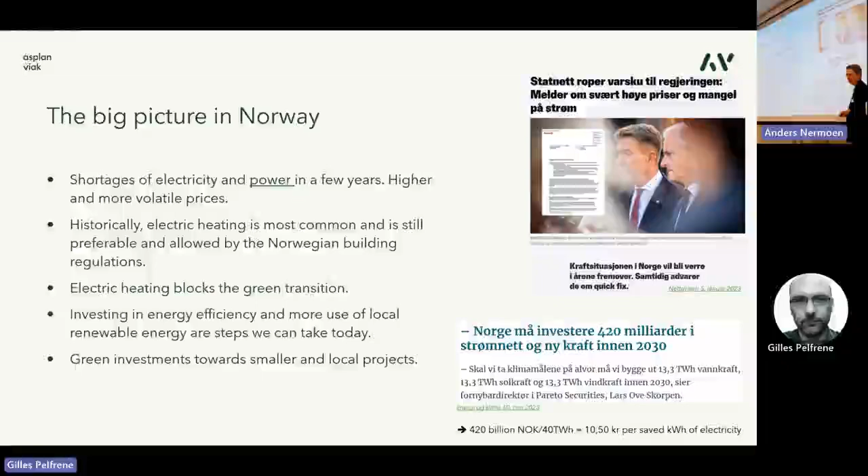And all these things we can do right now. There are also green investments towards smaller and local projects, which I'll come back to. If we use local energy and energy efficiency measures in our buildings, we can reduce the need to invest in new power generation, nets and infrastructure. And this is worth 10.5 Norwegian crowns per kilowatt hour in production capacity. So for every kilowatt hour we produce locally or save in other measures, it's worth more than 10 kroner for society.

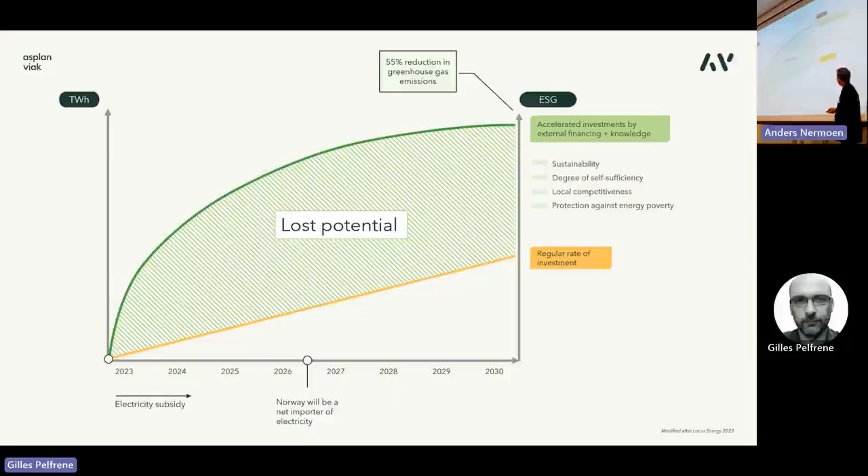So we have some goals in 2030, a 55% reduction in emissions. We have an electricity subsidy this year and next year. We will be a net importer of electricity between 26 and 27. The rate of investments is not high enough to reach those goals, but we can accelerate this with external finance and competence. And everything in between is lost potential. If we manage to realize that potential, we gain sustainability, a degree of self-sufficiency, local competitiveness and protection against energy poverty.

But it does not stop. In 2030, we have the Energy Performance of Buildings Directive, which is very relevant here, and everything has to be net zero in 2050.

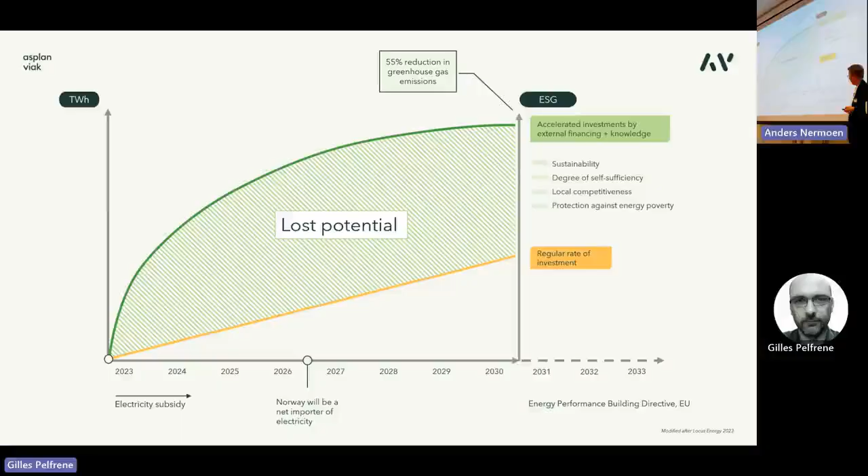So the potential for ground source heat: we can heat and cool our buildings with this technology in Norway, and that will produce 33 terawatt hours from the ground every year, equivalent to a fifth of today's electricity production. So it reduces the strain on the grid, and electricity can be used for higher purposes, industry and electrification of the transportation sector. And it's, of course, great jobs. This was a study from 2011 for the Norwegian energy authorities.

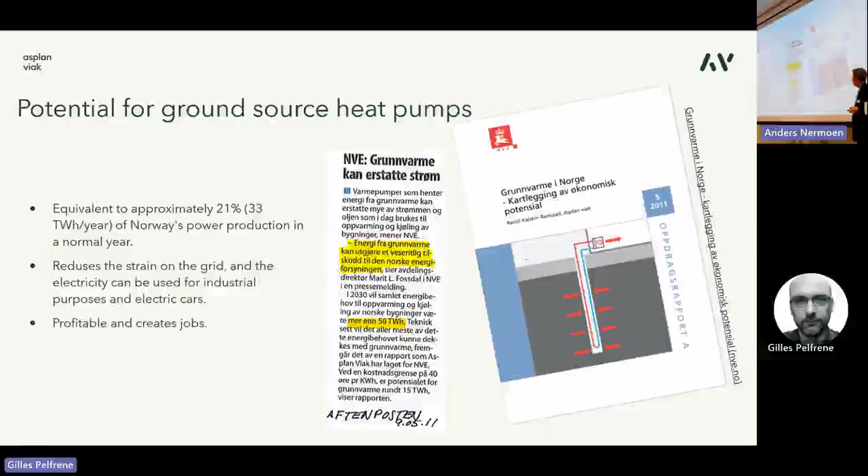So Asplan is involved in projects all around the country and also a few projects abroad, about 100 a year. And we serve several of the drillers in Norway and have developed services within the technology since we started at Asplan in 2008.

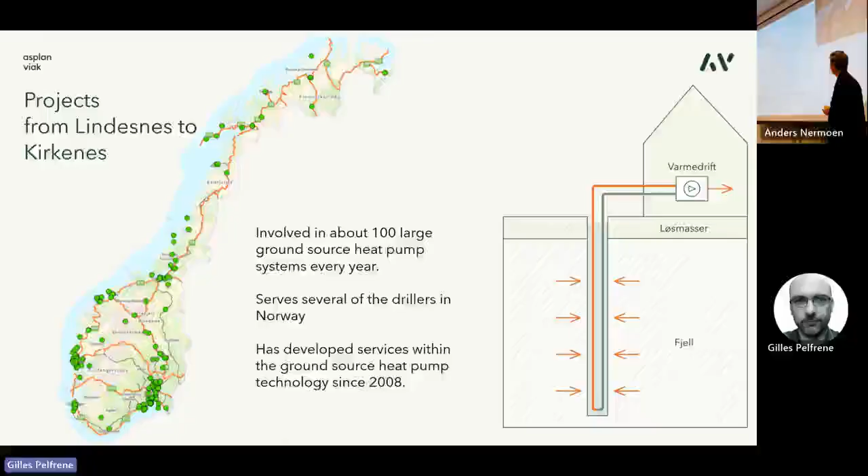So to the technology: we have a borehole with a plastic collector, and we have a heat pump. The normal temperature in the Norwegian bedrock is around 6, 7, 8 degrees. So we need a heat pump to raise this temperature to a decent level for heating the buildings, floor heating or radiators.

So the energy well looks like this. These are off-the-shelf products. We drill a lot of wells every day. Closed loop is most common and can be installed almost everywhere. Typical depth is from 150 to 300 meters, or sometimes deeper. Large and small, for a single cabin or for a large hospital or district heating system.

We collect stored heat in the ground, and this is not heat from groundwater movement. We have several measurements on that, so it's really stored solar energy in the top surface of the ground. And we can place the boreholes under parking spots, under buildings, etc. But of course, if you have a high heating demand, we need several boreholes, and the boreholes need to be some distance from each other.

Recommendation is 15 meters, and if you have very large heat demand, we need a lot of boreholes, and there might not be room for them on the area available. So then we recommend to make thermal energy storage.

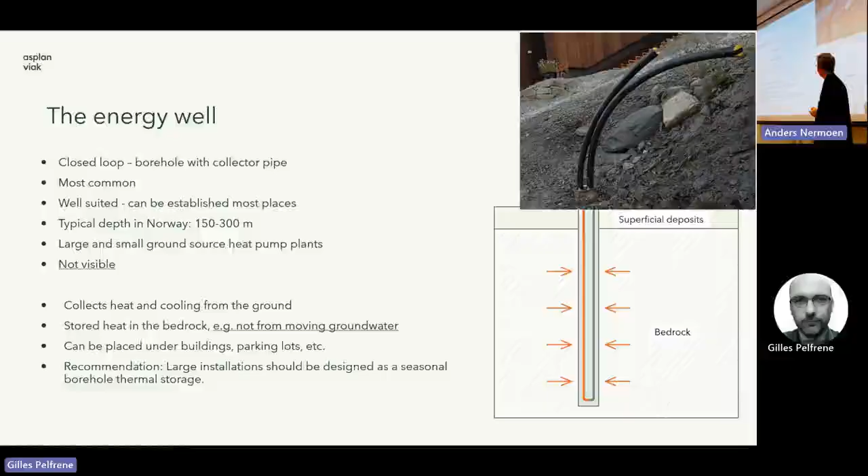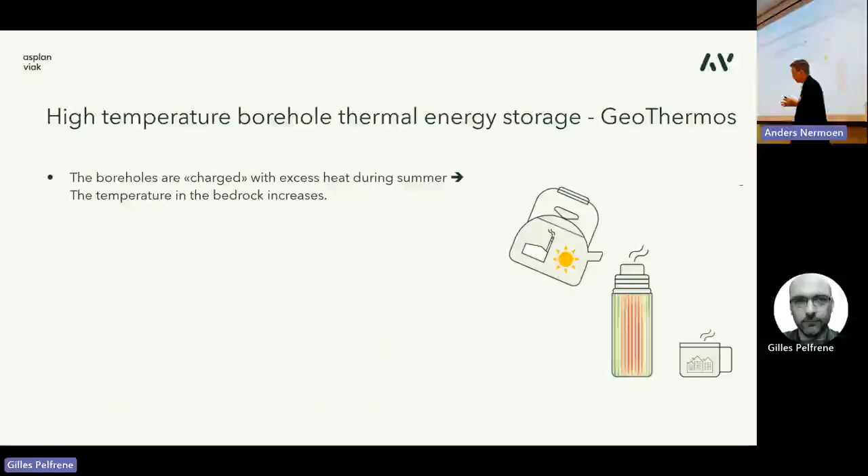We jump right to the high temperature borehole thermal energy storage, and this means that we put all these off-the-shelf energy wells close together, like a needle in a pillow, and we inject heat, more heat than we extract, so the temperature in the bedrock increases. This takes time, but if you have this large volume of warm rock, you can extract more energy during the winter, and that's the key point.

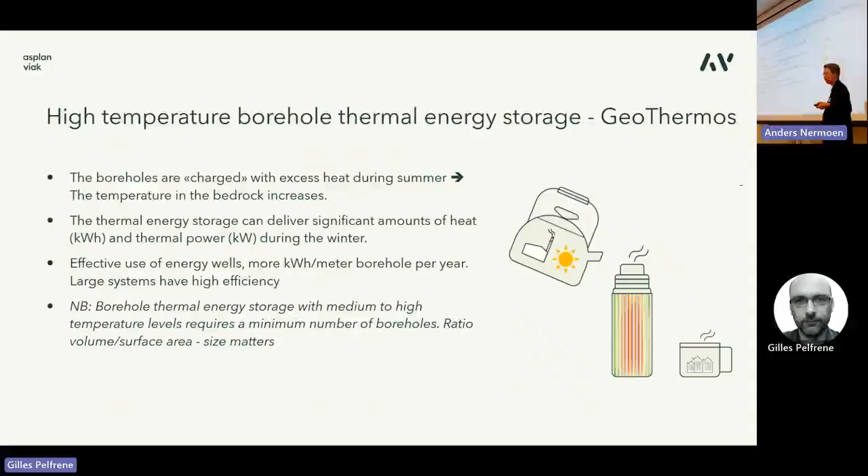And this is an effective use of the energy well, because the boreholes are a cost-intensive part of the installation, and large systems have a high efficiency. But this is not a single house technology. This is a large system technology, because size matters, and we need a high volume to surface area ratio, because we will have heat losses at the edges around here.

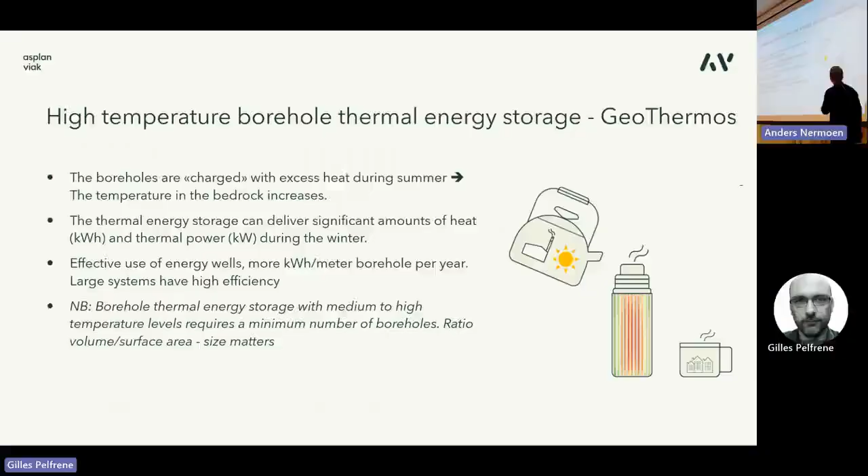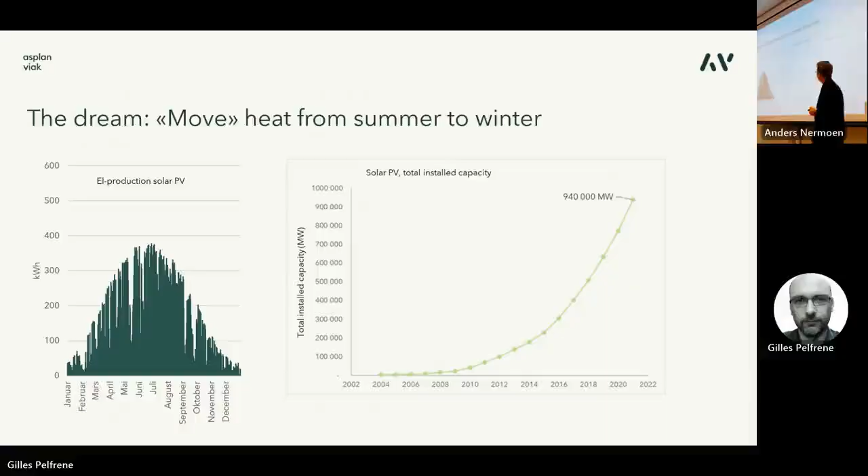So back to the solar PVs. The sun shines on a day basis, and also more in the summer than in the winter, at least here in Norway. And it's an exponential growth technology. The heating demand in Norway is the opposite. We need energy in the winter when there's no solar. But if we make GeoThermos, we often call it GeoThermos, and I'll explain why, we can utilize this so that the electricity demand matches the PV production.

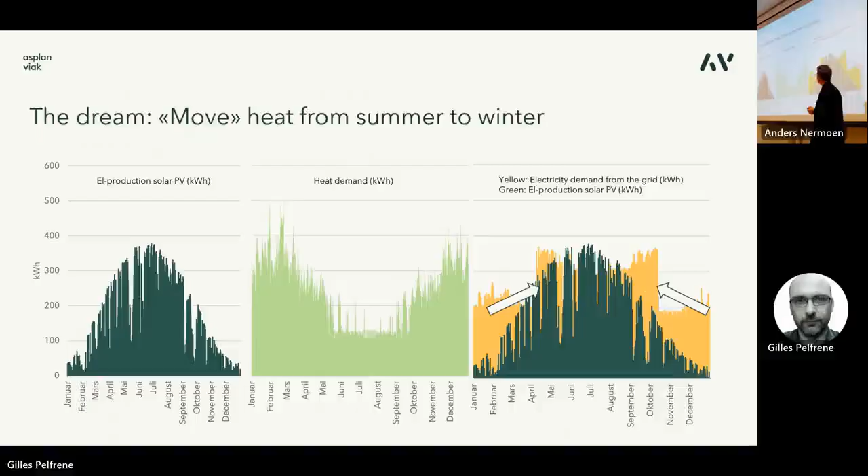So how to do that? We go to Fjell school in Drammen. This was a school built in 2018-19. It's 10,000 square meters, and it is a high temperature borehole thermal energy storage, for direct heating of the school. Note that it has floor heating with 15 centimeters distance between the pipes in the floor, which means the room can be heated from 25 degrees and up. This was partly funded by Enova.

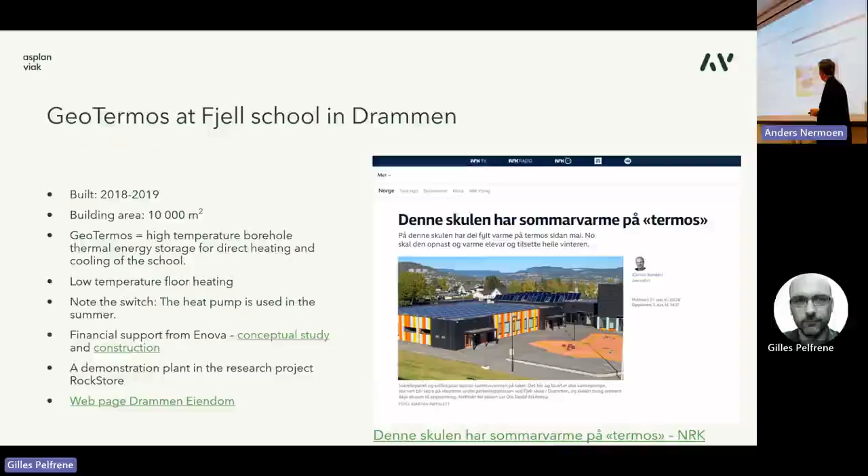So it's quite a small plant, but it's 100 boreholes of 50 meters depth, and it's 4 meters between the boreholes. So what's really happening here? You see how we can put all these off-the-shelf products together to create a new thing. We have the solar panels, which give electricity for the heat pump, and the heat pump gets the heat from the outside air during the summer via a dry cooler, and lifts the temperature to 50 to 55 degrees and puts it into the 100 boreholes here.

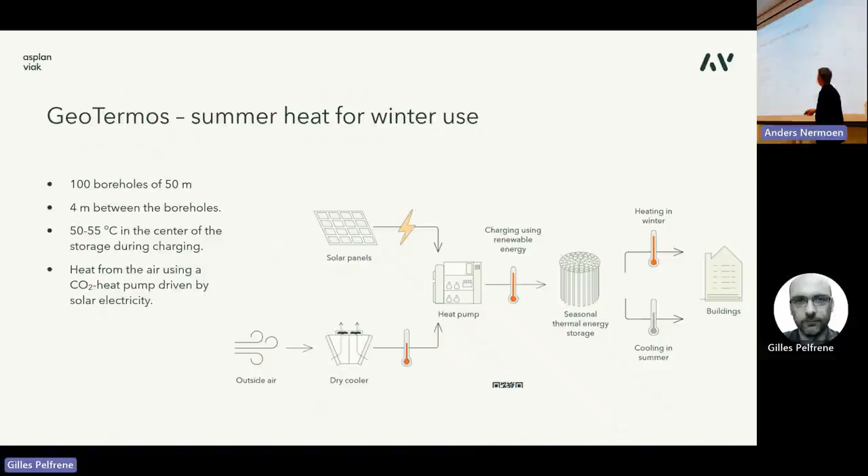So within 2 years, the temperature rises from 7 degrees Celsius to about 40 to 45 degrees inside here. And this is enough to just circulate it back into the building again for floor heating. Just a circulation pump of 800 watts is enough to heat the building during the winter. So then we're talking. It's a very fascinating project. And here you see it during the construction period with all the snakes.

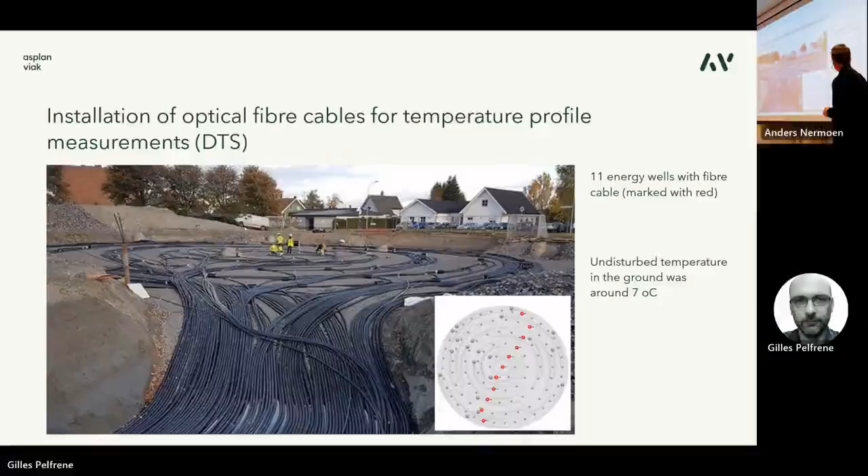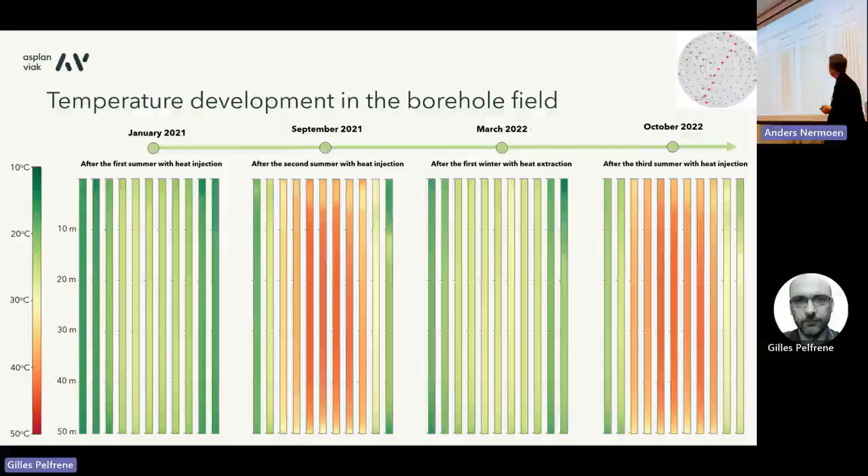This last winter was the first winter with full operation of extraction and heating the school, and 150,000 kilowatt hours was extracted from the wells directly to heat the school. And this was last fall, and the results are even better this year, but we haven't analyzed it in detail to be presented.

Just to switch to a larger project in Trondheim in mid-Norway. This has been studied in a conceptual study, and it's integrated into the district heating system in cooperation with Statkraft in Trondheim. So this is an area with around 400,000 square meters of new buildings. This is a transformation area in Trondheim.

So for heating this area, we need 250 wells and can deliver approximately up to 15 gigawatt hours a year and 5 megawatts of thermal power. So then we utilize the excess heat from the waste incineration, which is available in the district heating system, and we store this 90 degrees temperature in the ground, and we can extract it out at between 60 and 45 degrees for direct heating of the whole area.

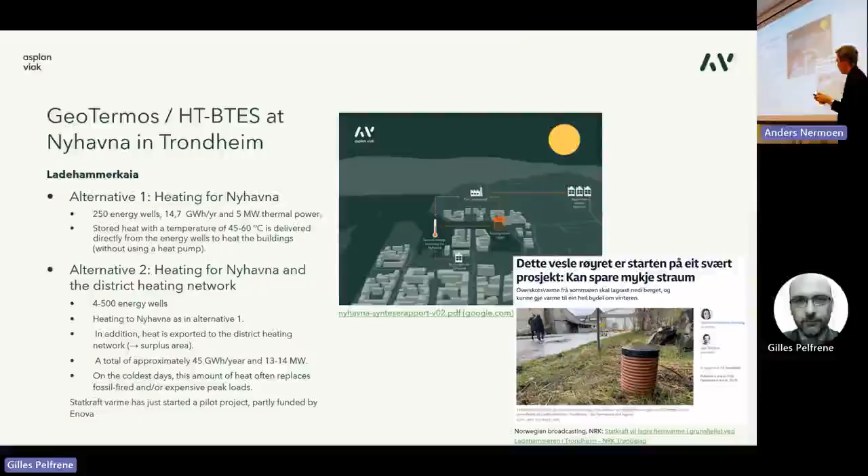If you make a larger version with 400 to 500 energy wells, we deliver heat for the Nyhavna area as in alternative one, but in addition we also integrate it into the district heating system, and then we need a heat pump between the storage and the district heating system because it's higher temperature. And if we do this, we can deliver up to 45 gigawatt hours a year and 13 to 14 megawatts. And of course, this will relieve the energy system during the peak hours.

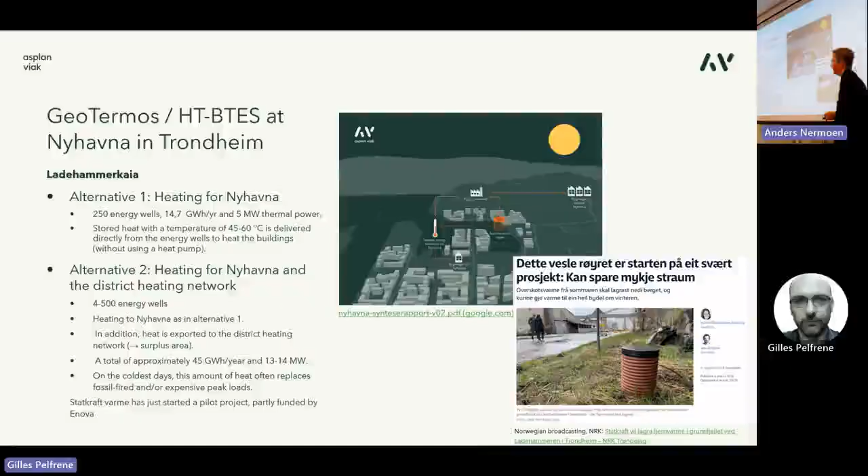So this project has gone further into a pilot study, partly funded by Enova, because we have to check that the collectors can tolerate the temperatures in the field, and also some geotechnical issues and some more investigation of the groundwater situation. And if you build this larger version here, it's the size of the Cheops pyramid. Just a fun fact.

So the potential of this geothermal solution is not calculated, but we think it's quite large because we can integrate it with the district heating system, and that's really the big thing. And the second big thing is for industrial purposes and in areas with large flows of excess heat. And we have these large building areas, larger buildings and areas with new buildings that require low temperature. And we need a size from approximately 1 gigawatt hour and up.

This is, of course, especially well suited for performing on cold winter days when the energy system is stressed, and the industrial purposes can be significant. But we have to take care of the geotechnical issues here. The clays, there's not very much research on how the clays will respond to high temperature. So now we try to avoid it.

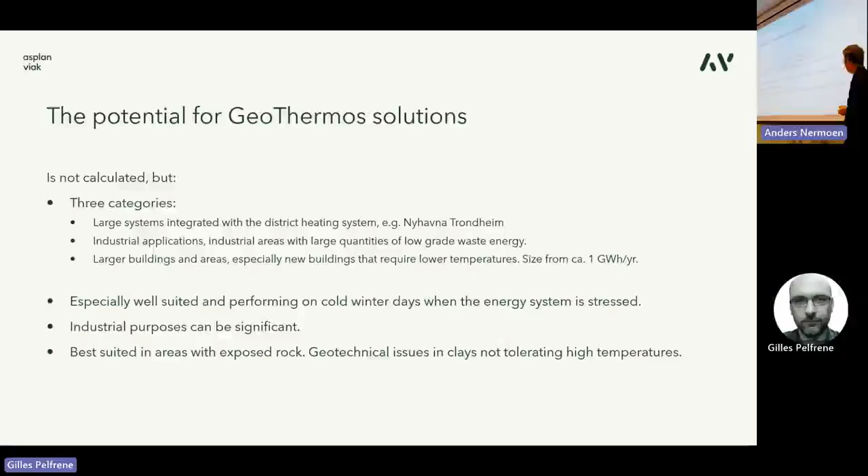So how to reach the potential for the ground source heat pump technology and geothermal solutions? There's a financial barrier which Anders talked about. It's still there, well, we are about to remove it. Actually, that's the point here. But the high investment cost in renewable energy is an unfortunate hurdle.

And there are three categories when it comes to this technology. The building owners operate and invest themselves, and they're interested in low operating costs. But the private developers invest for sale, and they will want to minimize their investment. And also the public developers have two budgets: an investment budget and an operating budget. And the governmental subsidies in Norway are among the lowest in Europe. And this makes way for energy services, which will come now.

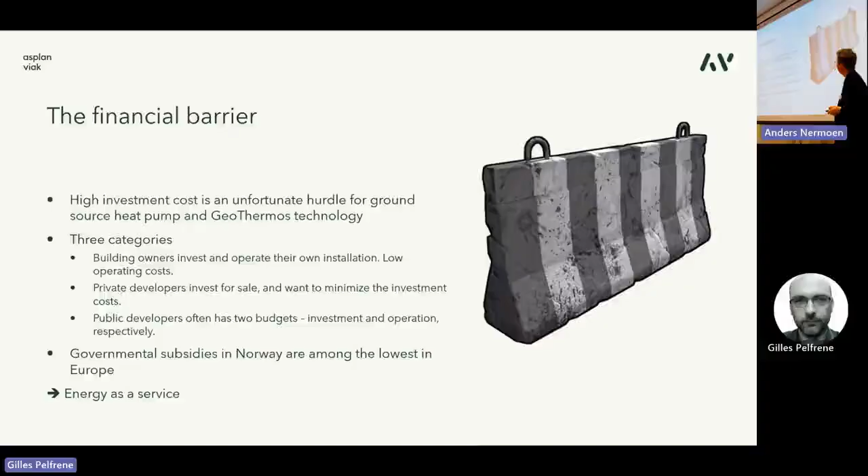Several examples, and one is the SEB Nordic Green Energy Fund, and this is Skandinaviska Enskilda Banken. And this is a fund with focus on renewable energy, among them solar PV and ground source heat pump technology. It's managed by SEB Investment Management. So the fund invests in the systems, in solar and ground source heat pump systems, and the customer receives renewable energy at an attractive and competitive price.

And we have cooperated with SEB for the last year and are the Norwegian agents for the fund. So we follow the process from the idea to planning and construction, and also operation and management of the plant. But the purchase of the energy is from the SEB fund, and it's decided in an agreement.

So what's the value for the customer? Profitability, no investment cost. That really has been a hurdle. Lower and more predictable energy costs. Increased value for the property, sustainable financing in accordance with the taxonomy. The fund is an Article 9 fund in the taxonomy. So we have a lower climate footprint, and it's certified as sustainable energy, and you get a more sustainable property portfolio, and local and renewable energy contributes to the green shift.

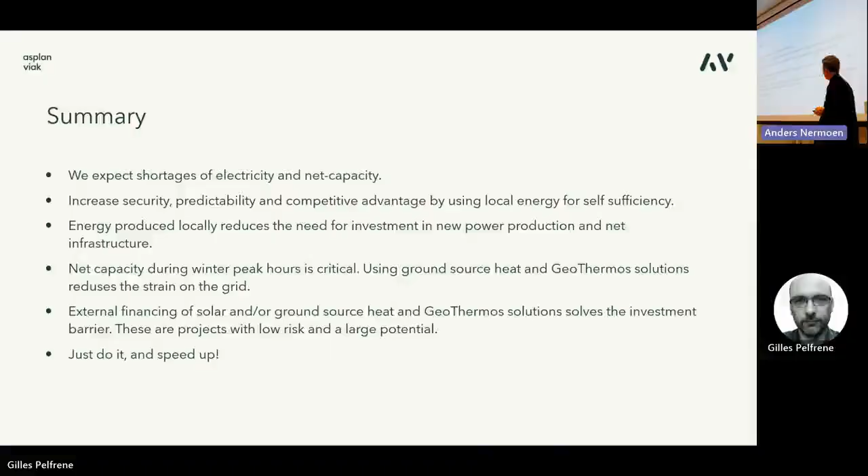And of course, the external financing of solar and ground source heat and geothermal solutions solves the investment barrier, and this is a project with low risk, and there's a large potential to do these projects. So just do it and speed up. Thank you.

Thank you. It's really impressive to see these new geothermal concepts that are coming. Are there some questions? Please.

You mentioned that this was not a single level solution, and you also mentioned 50 meters depth. My question is, what is the recommended number of wells and depths to make this the preferred solution? Could everyone hear the question? What's the minimum size, I think the question is about.

We need a heating demand of approximately 1 gigawatt hour a year. But of course, the geothermal was designed to 350,000 kilowatt hours a year, so that's a smaller version than we recommend. But if you go from 1 gigawatt hour up, it becomes more and more interesting. It's not a defined limit, it's project specific. But the larger, the better.